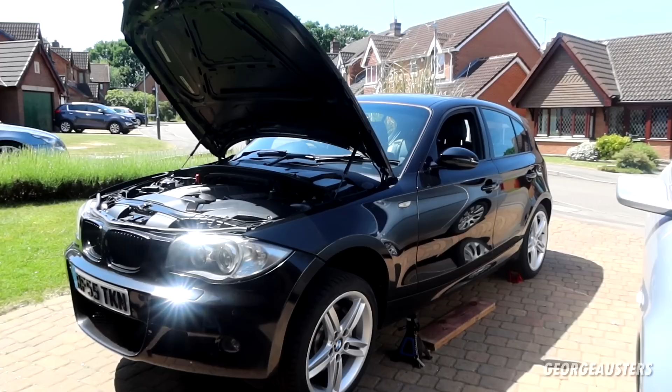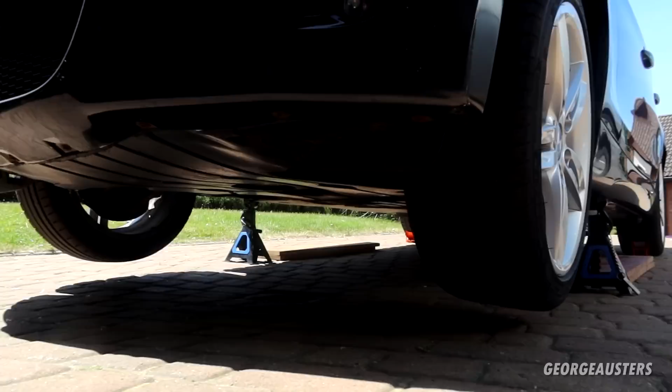Okay then, so as you can see, the BMW 1 Series is up in the air. I have supported either jacking point with a jack stand, and you're going to need the front wheels off of the ground because the wheels need to be removed. And once you have it up in the air, you're going to want to remove the front under tray, and that is just held in place by a bunch of these 8mm screws here. So let's get on to removing all of those.

Okay, so there is that front under tray removed, and we still have a coolant leak, which means a new water pump is needed. And now we can start removing the wheels.

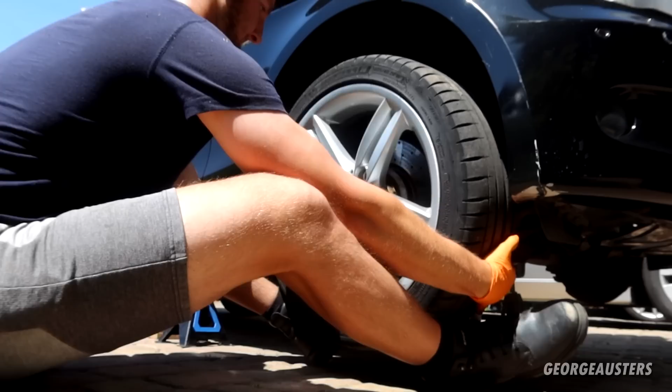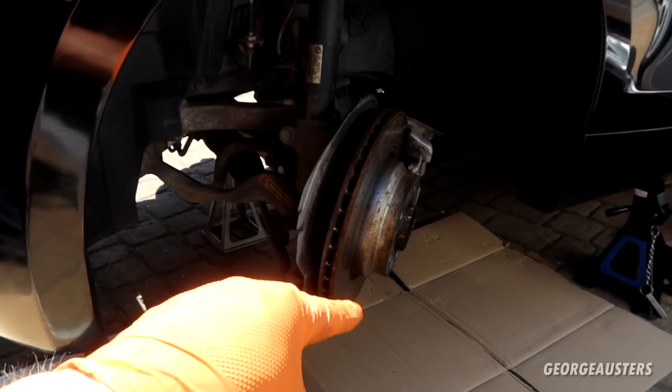The next thing you're going to want to do then is turn either side, whichever side you want to start on, turn the wheel all the way outwards so that you have access to the track rod end nut. This is the nut that you need to remove here.

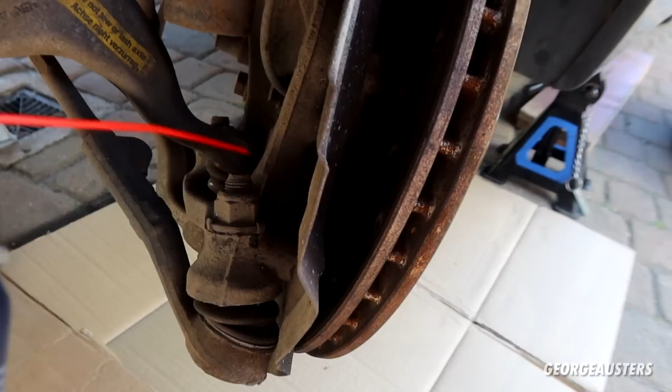Now there is a good chance that the ball joint will actually be seized into the hub itself. It happens very frequently. Sometimes you have to use heat, sometimes you have to end up smacking this thing to death. But yeah, let's hope we get lucky today. So we need to remove this nut, and before we do that I'm going to spray it with some lubricant just to give us any chance of getting this thing off. Just let that soak in for a couple of minutes.

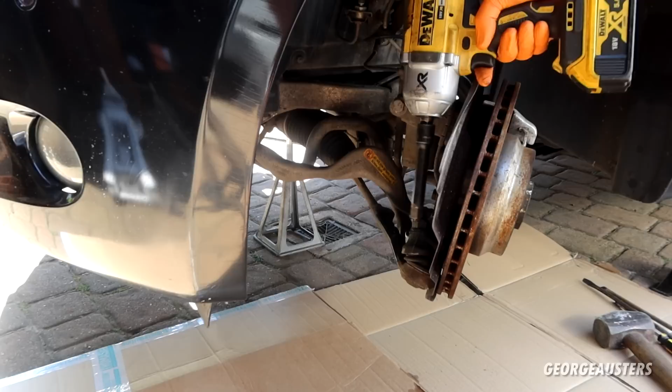And now that we've let the nut soak in that lubricant for a good couple of minutes, I'm going to try and crack it loose. Now, I did plan on using the impact wrench, but I just can't seem to get the correct angle. Obviously you want to make sure that you are on it square, and I really don't want to round this off because then it means cutting it off and all sorts. So I'm going to try and crack it loose with the breaker bar first.

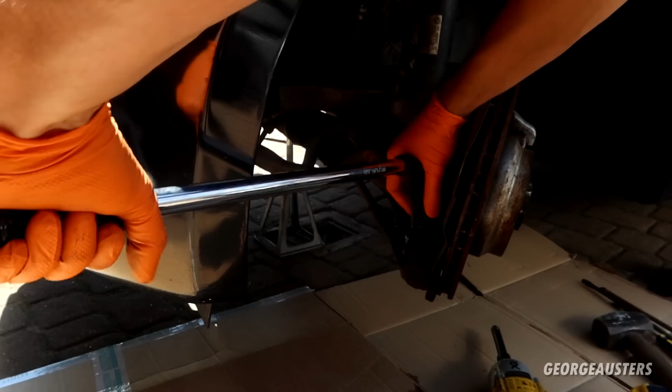Did that just come loose? I'm not sure. I think it did. I think it was moving. Yeah, we've cracked it loose. Let's see if we can remove it with the small impact wrench. It's either going to come straight off or it's just going to spin the ball joint itself. I'm going to guess the latter.

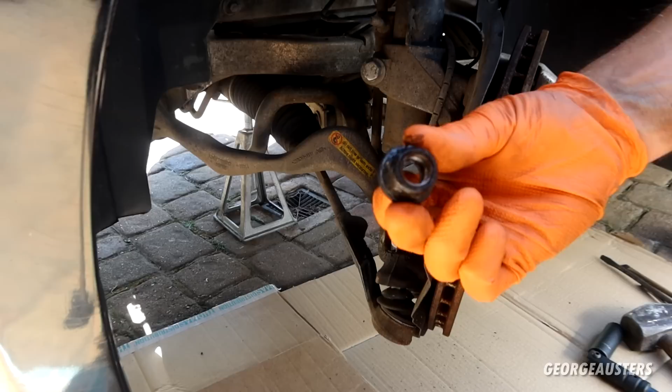You know what? I might be wrong. That's coming off. That's definitely coming off. Done it. There's the nut removed. With any luck, this won't be seized in here. I don't think it is, because it did seem to move quite freely. Look at that. I just wish it was always that easy.

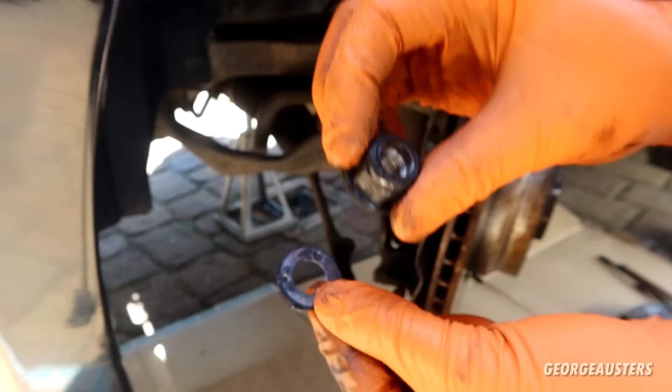Yep, this ball joint still has quite a bit of life left in it. Obviously not as good as new, but still pretty stiff, to be honest. Oh, that's the retaining washer, I guess you could call it. It kind of has 3 tabs. As you can see, there's only 1 tab left on it now. It just kind of locks in the nut on the ball joint. But yeah, this is just scrap now. It's not even needed. The new track rod should come with a nylon locking nut, so we don't really need this.

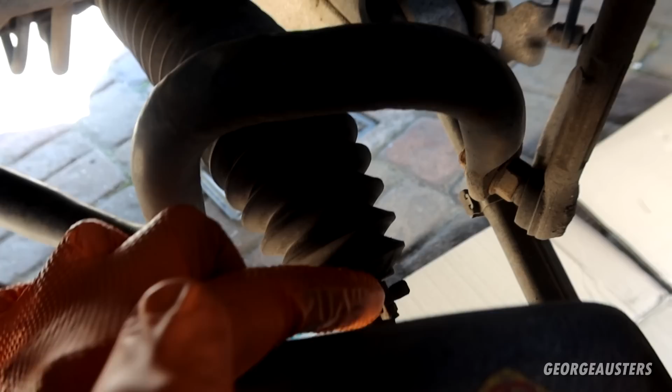The next thing you're going to want to do then is remove the rubber boot that protects the track rod itself. So this end is just a case of getting some pliers on there, squeezing it together, and this clip should come off. And then this side looks like one of those one-time use only securing clips, so you just need to get a screwdriver in there, prise that out, and then that should essentially break. You can't reuse these, they're just a one-time only use thing.

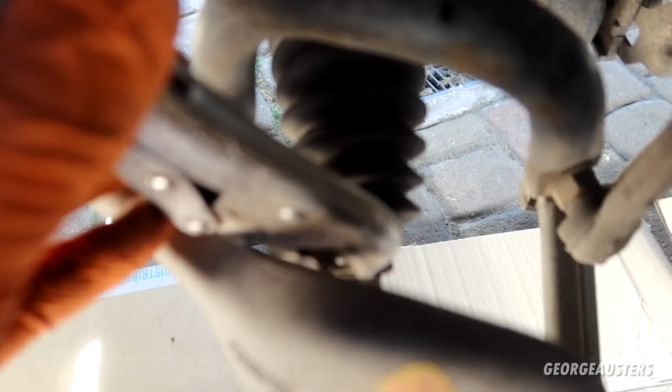Okay, so I've actually got some vice grips on this one just so I don't have to keep it clamped shut, and as you can see, this clamp is now off. That's that one removed then. And then, like I said, with this one you want to get a screwdriver or something like a pick. I'm going to try and use a pick and just get it in that slot, and like I said, don't worry about breaking this, it's only a one-time use clip.

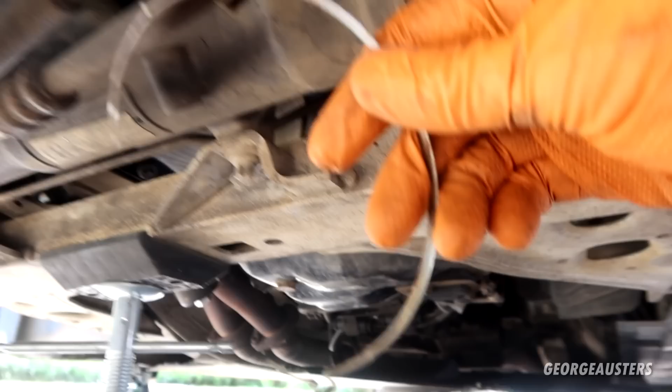Now obviously if you want to reuse this boot, we're not going to be today, we have a brand new boot and securing clips and all the rest of it, but if you want to reuse it, obviously try not to damage it. There we are. That's that removed, and now the boot itself should pull off of the steering rack.

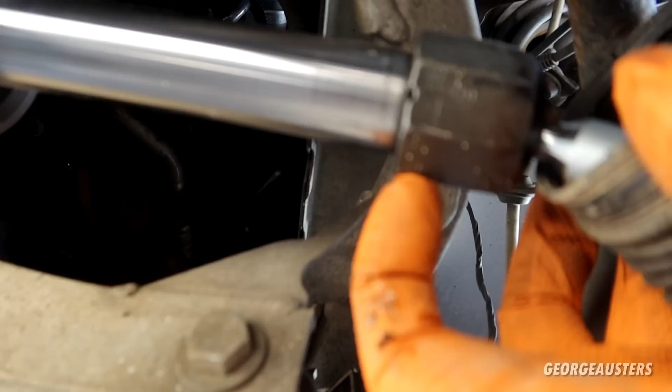There we are. And now to remove the track rod assembly from the steering rack. As you can see, we have some flats on there, and that is what we need to get on with a wrench. Crack that loose, and then the whole assembly should spin off the rack itself.

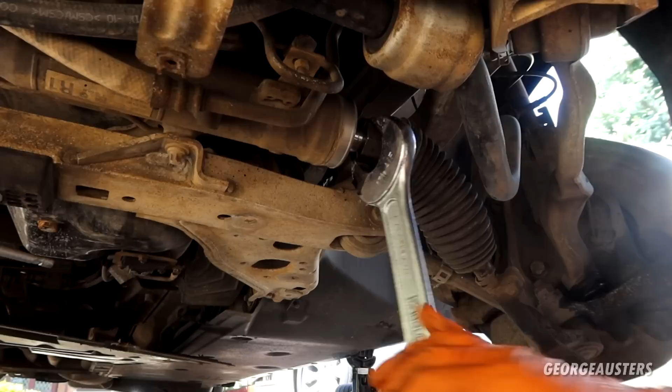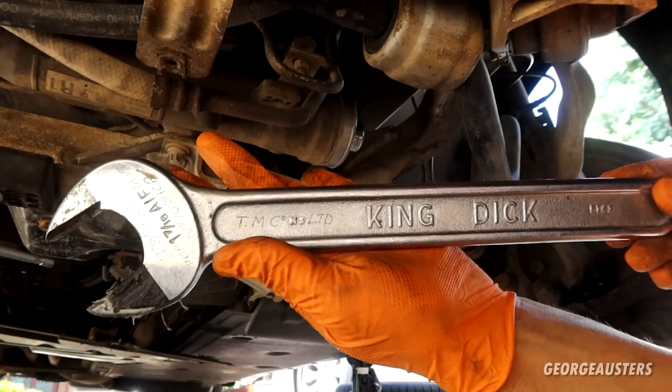There we go. It's cracked loose. And you can just twist the entire thing off. If you're wondering what size wrench I use for that, it is an old Imperial one, so it's 1 1/16, so that's just over an inch. But yeah, this seems to do the job quite well when it comes to these track rod assemblies.

Now what we want to do next is try and make our new part, the new track rod assembly, the exact same length or as close as possible to the length of the original part, because we know that the toe alignment, the front toe, is relatively good on the car, so we want to try and match that with our new part. We don't want to drive down the road and have our front toe way out, because that is going to wear the tyres unnecessarily. So we want to try and make this as close as possible to the length of the original part.

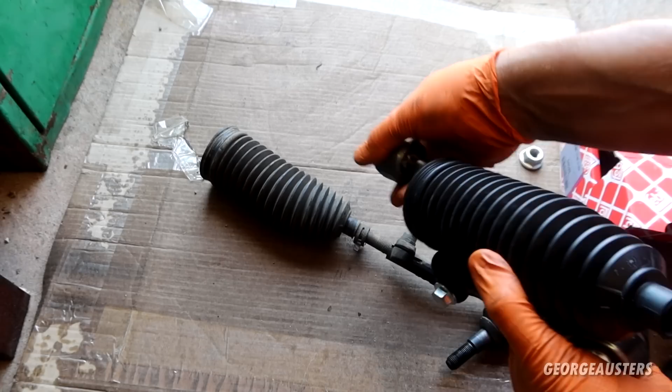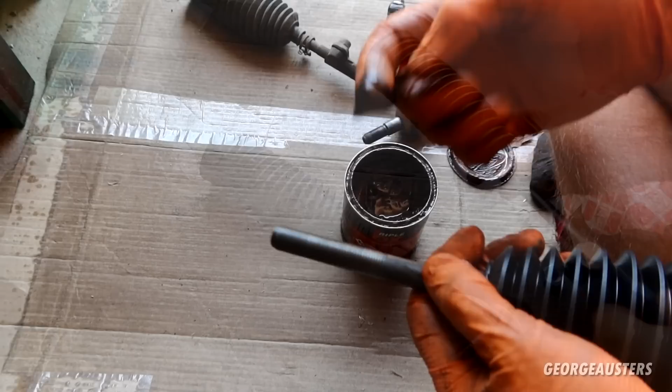Now before we start adjusting the length of the new assembly, we need to install our new boot, and it should just slide over like so, and once that is in position we can then start adjusting this and making it the exact same length as the original part. Now I like to apply some copper grease to the new threads. This is just going to make it a lot easier when it comes to adjusting the wheel alignment. Whoever does the wheel alignment is definitely going to thank you for it. Just going to make things move a whole lot easier.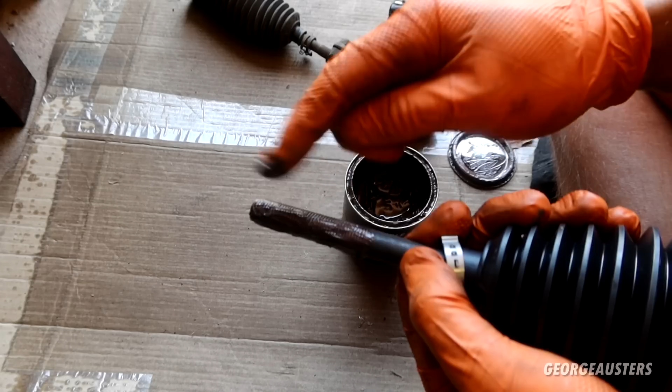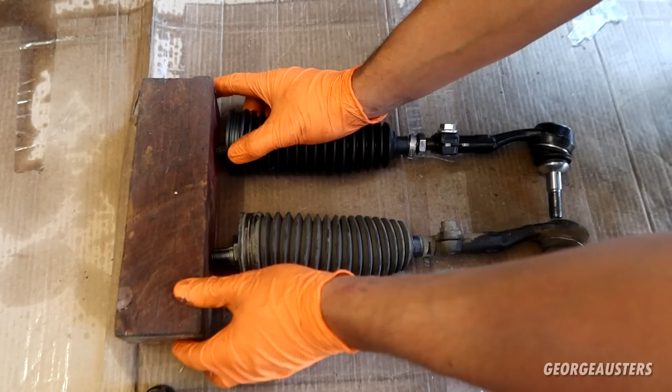And now we can try and get the new assembly as close as possible to the length of the original assembly. That is about bang on, I would say, or as close as we're going to get it. So you can see I have the ends right up against that piece of wood, and that is roughly about the same length. Obviously they're not at the exact same angle, but like I said, we're not going for absolute perfection. That's what you do when you have the wheel alignment and when they make the front toe adjustment. So yeah, I guess now what we need to do is tighten down this nut and then this nut here to secure the track rod end to the track rod itself.

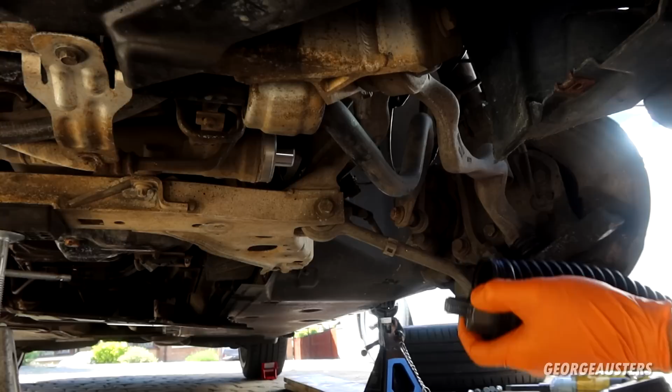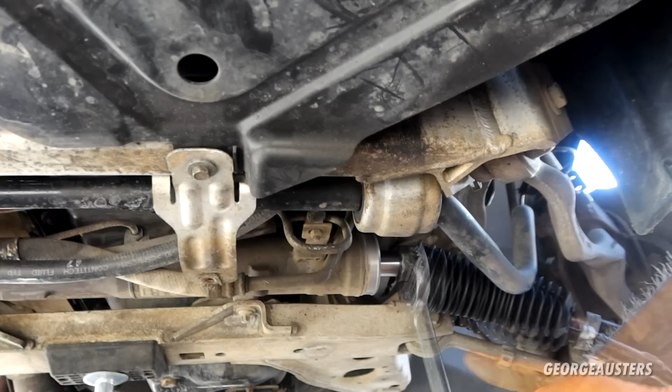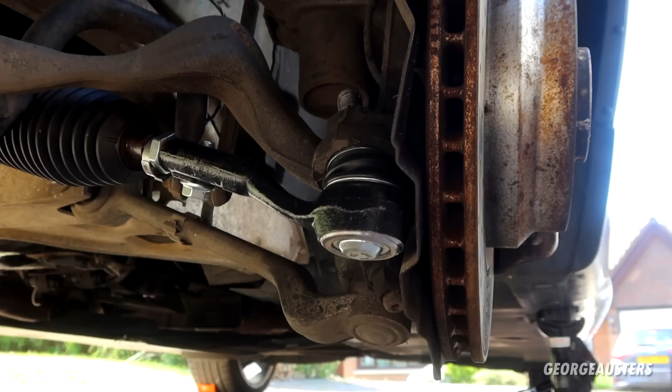And now if we come back over to the car, we can start screwing our new assembly into place. It can be a bit difficult to start because we have all these control arms in the way. So managed to get it started. I just got to twist it all of the way on. And now I can tighten it down. How tight does this have to be? Just keep it going until it stops. That's plenty tight. And now we can get the ball joint side into the hub. There we are. And now we can install our new securing nut.

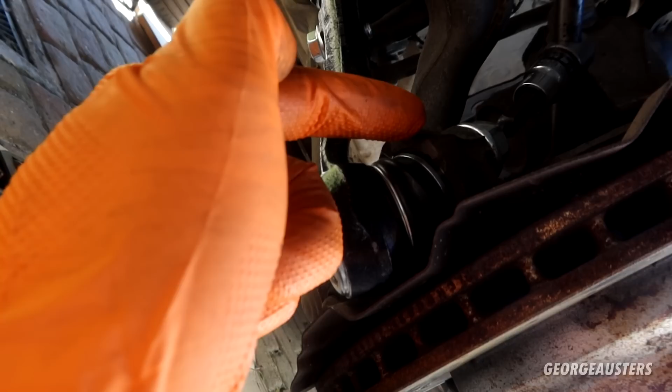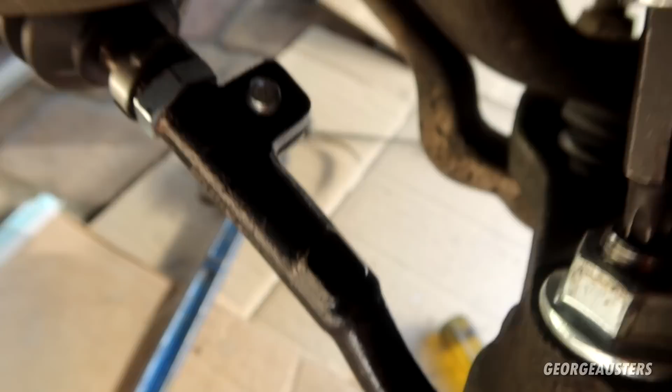Now then, to tighten down the securing nut, if you just try to use an impact wrench or a socket and ratchet on there, what's going to happen is you're going to begin to twist the ball joint, and then this boot is going to get messed up. So if you want to keep this in good condition, the best thing to do is get something to stop the ball joint from spinning. And in our case it is a T45 bit. Put that in the top, make sure it's wedged nice and secure so it can't go anywhere, and then just tighten down the nut with the regular 21mm wrench. There we go, that's tight enough.

And now all we need to do is get our rubber boot into position. So if we grab this end and slide it over the steering rack itself, there we are. I've actually found some Jubilee clamps and these secure so much better. They're much less flimsy, so I'm actually going to install these instead. And there we go, that's the Jubilee clamp installed.

And then when it comes to the other side, we don't have a replacement Jubilee clamp, so we are going to make use of the supplied one-time use only clamp. So first of all, you want to make sure that the rubber boot is all the way along and is sitting in the grooves. If you're not sure, just compare it to the other side and then you'll see exactly where it needs to go. But yeah, let's get this in place and clamp it down. There we are then, that is that securing clamp on, nice and tight, that's not going anywhere.

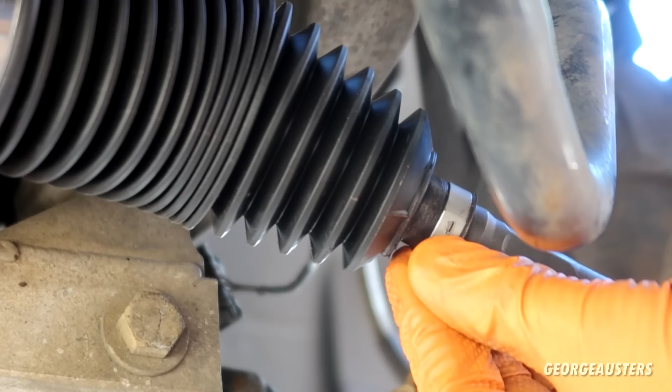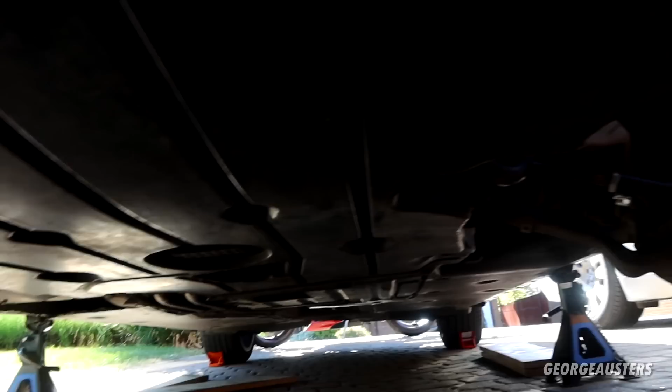And with that done, that is this side now complete. We just need to do the exact same on the other side. And there we are then, that's the other side done as well. And as you can see, I've reinstalled the front under tray, and now what's left to do is get the wheels back on.

Okay then guys, so that is the track rod assemblies now replaced on the BMW 1 Series, and I have just took it for a wheel alignment. Now on the way there it was a bit dodgy. I think I had some toe out on either side, so we didn't get it exact. Like I said, you don't really have to get it bang on.

You can try and measure it to the millimeter, you can count the turns, whatever you want to do to try and replicate on the new assemblies, comparing to the old assemblies. But it really doesn't matter. That's where you go for the wheel alignment, to get it exactly bang on. And yeah, I'll show you the results.

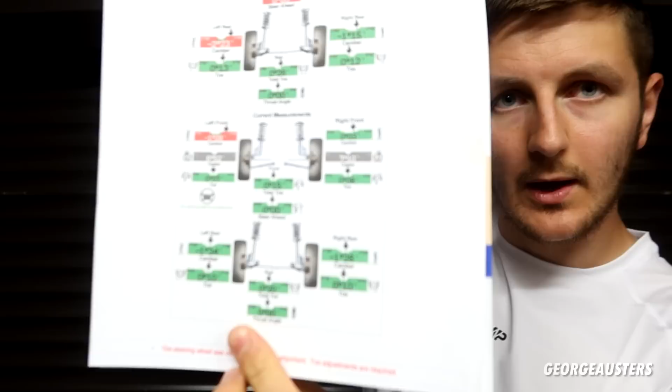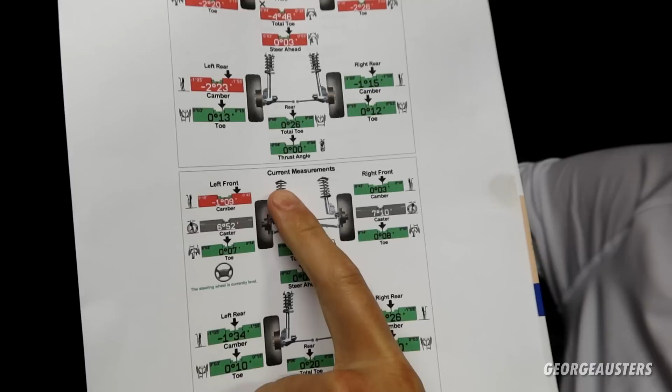So this is how we are looking. So this is us in the bottom. This is what we are looking like right now. So as you can see, we only have one in the red, and that is camber, the front camber, which is not adjustable. The only way you can adjust that is if you knock out the locating pin for the struts, which I don't really want to do. I'm going to be replacing the entire suspension at a later date anyway.

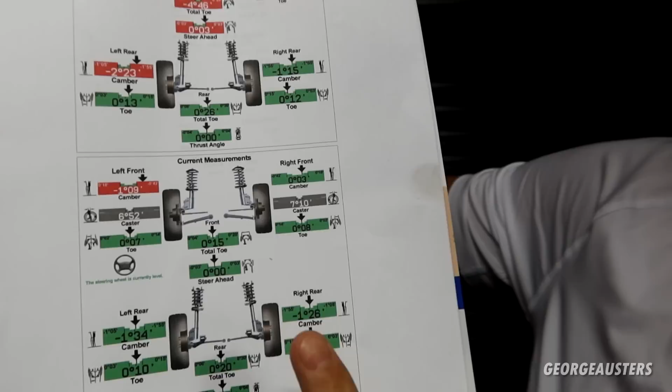But yeah, as you can see, the front toe is bang on in the middle. The rear camber is bang on in the middle. The rear toe is bang on in the middle. The only adjustments that they can actually make is the rear toe, rear camber and front toe. But if you actually have a look, before, the rear camber on the left side was actually out quite

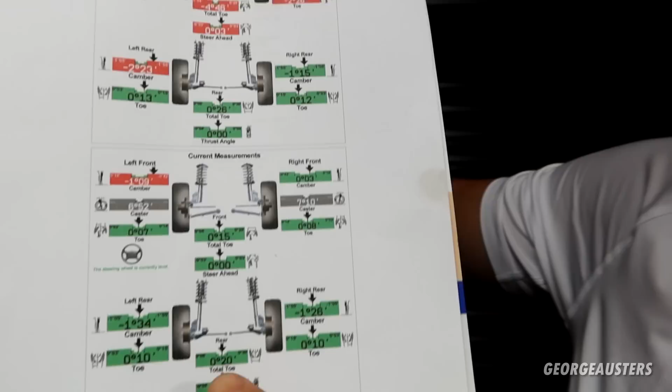a bit. So that has been corrected, and I'm pleased to announce that the car actually drives a lot better now. It feels so much more stable and, I don't know, tight, I guess. I didn't even know we had rear camber out on the back. So yeah, that's all good now.

And if you are wondering where I take my cars for a wheel alignment, and if you're in the UK, this is going to be relevant for you. If you're not in the UK, then it's not going to be relevant at all. But there is a garage called Kwik Fit, and UK guys, I know you're going to be thinking, oh, what are you going to Kwik Fit for? You're going to say this and that.

This isn't a sponsored video. I haven't been paid to say this or anything. I actually use Kwik Fit. I pay my money to Kwik Fit. They are generally very, very good for wheel alignment. You pay, I think it's £120 for a 2-year cover, and you get like 8 different visits, and on those visits you can have as many different adjustments as you need. As you saw today, I had to have front toe, rear toe and rear camber on either side. So it's well worth your money in my opinion.

But yeah, I wanted to make a point. When you have a wheel alignment, you need to go somewhere that has a 4-wheel alignment machine, so a Hunter wheel alignment machine, because they are generally the best places to go to. A lot of places will say they do 4-wheel alignments, but they don't have the Hunter machine, so they can't really adjust the rear toe, rear camber and all the rest of it. So you need to go somewhere that does have that.